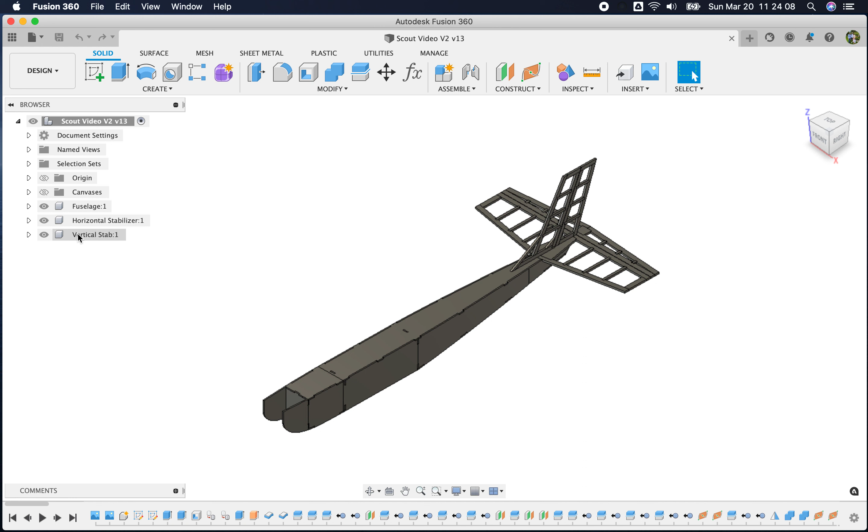But one thing I wanted to do really quick, someone asked me how to export these files or parts into a format you can transfer to a laser, CNC, or whatever. I'm just going to do the real simple version, and later on I'll tackle how to achieve that with the curved surfaces on the fuselage sides. That's a little more involved process, but real quick, I just want to show how you can export these flat pieces into a file you can send to Lightburn or whatever you're using for your CNC operations.

It's really not too difficult. Let me turn off all of these things, and I'm going to use this top piece here and show you how that works.

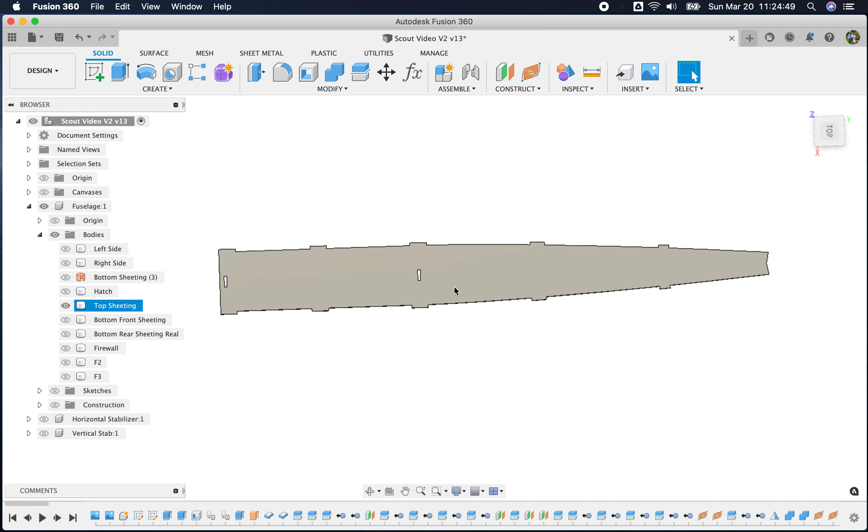This piece is flat, which makes it almost ready to go as it is. But we have these holes, tabs, slots, and other shapes. There are several ways to do this, and some videos out there talk about it, but the simplest way is to click on the face of what you want to export. I'm going to click on that and say create sketch, and that will select this, and we want to project all of this outline and these shapes.

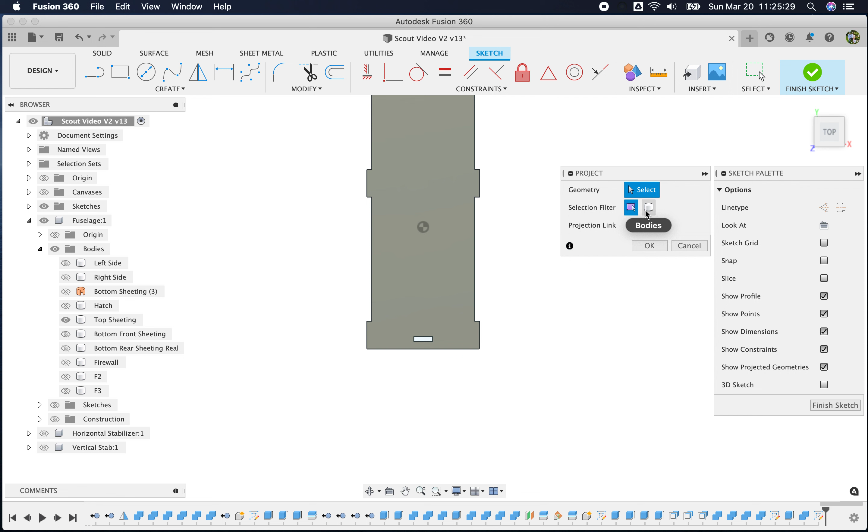I'm going to hit P for project, and choose specified entities, not the whole body. Sometimes that can get a little strange, sometimes not. If you notice, when I hover over this, you see all that red — those are the lines that will get projected into the new sketch. I'll click on that to select it all, say OK, and from here we can finish the sketch.

Now we need to find our sketch. That sketch is up here because this was selected — here it is, and we can turn the body off. If you look, this shows our outline, and we have our slots for everything here.

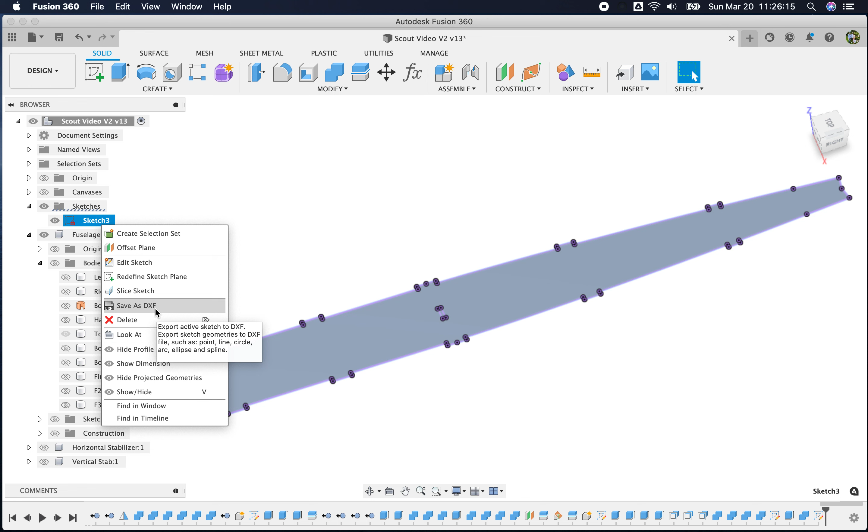I'm going to right click on the sketch and save as DXF. Really simple. I have different spots where I save things, so I'm going to create a new folder here — this is the Scout. I'll call this cut files, but you call it whatever you like. This is just my way of sorting things.

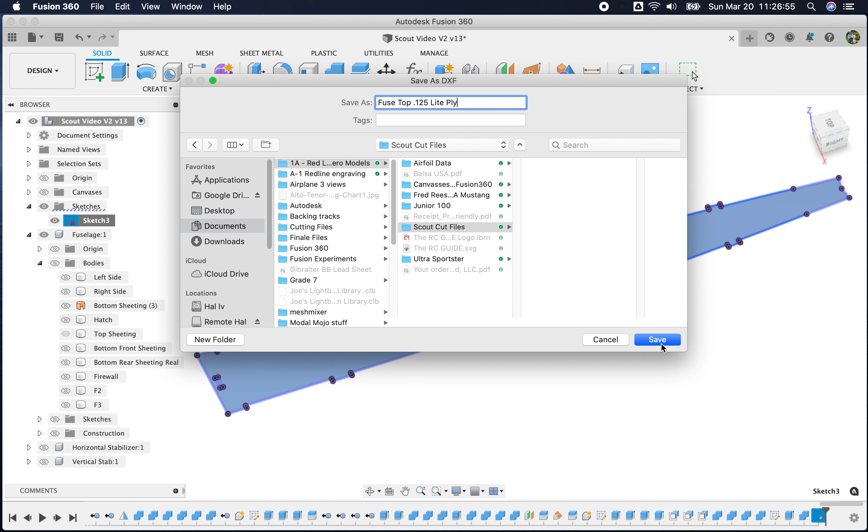Then I'm going to save this as Fuse Top, and I'll put the material in there. Normally what I do, I'll show you real quick. Alright, so I'm going to save that like that.

So now if we go to my Finder here, here's my folder. Usually what I like to do is make all these parts — there's my aluminum parts, these are my 3/16 balsa parts, and fuselage parts are broken down by the different materials in here. I'm going to cut this airplane out soon, so I'll show you all what that looks like.

So now what I do, I use Lightburn to drive my lasers. It's just a simple matter of importing it into Lightburn — where's our folder? Where did the Scout go? There we go, man, I'm blind this morning. Then I hit open, and there it is.

Depending on your workflow in laser, which we can get into later on, there we go — that's the part exported into our machine, or the software that talks to our machine. That's the simple one; we'll get into more complicated parts later on.

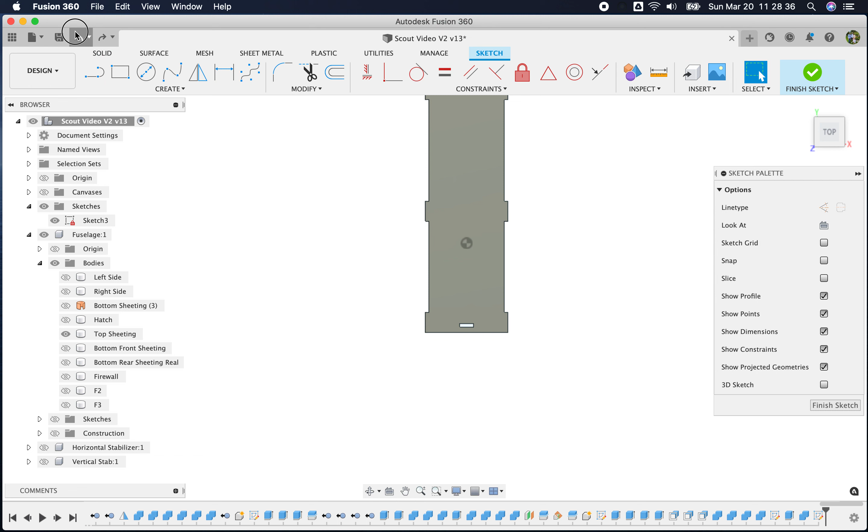All right, now we're going to go back into Fusion. I don't need this right now, so I'm just going to undo what I did, and then we're going to go back to talking about wings.

Okay, so we need to create a new component — again, always create new components. I always build one wing and then mirror the whole component, that way you only have to build it once. So I'm going to call this left wing.

All right, now we have the left wing highlighted, and let's go turn on our canvas, and let's see if we get our side profile canvas.

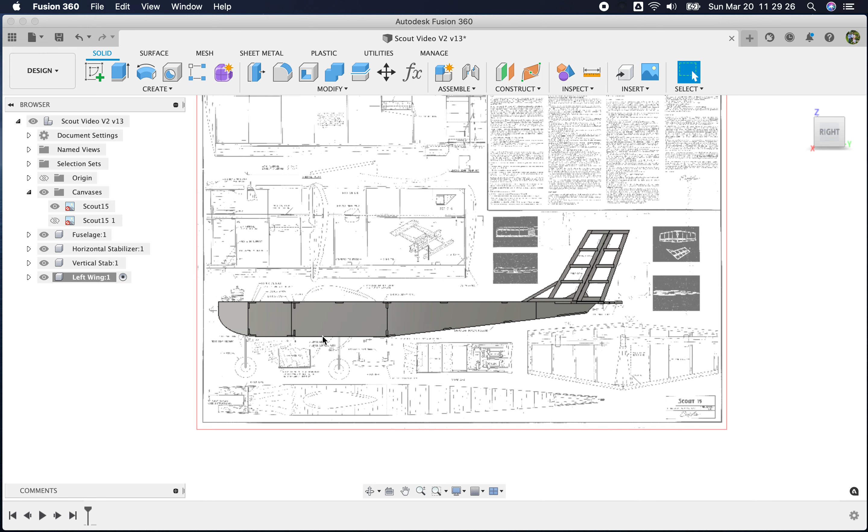Yeah, for some reason, this thing got really slow when dealing with some of these canvases, and I'm not totally sure why. Okay. I'm going to turn the fuselage off for now, and I don't need these others. All I need is this right here.

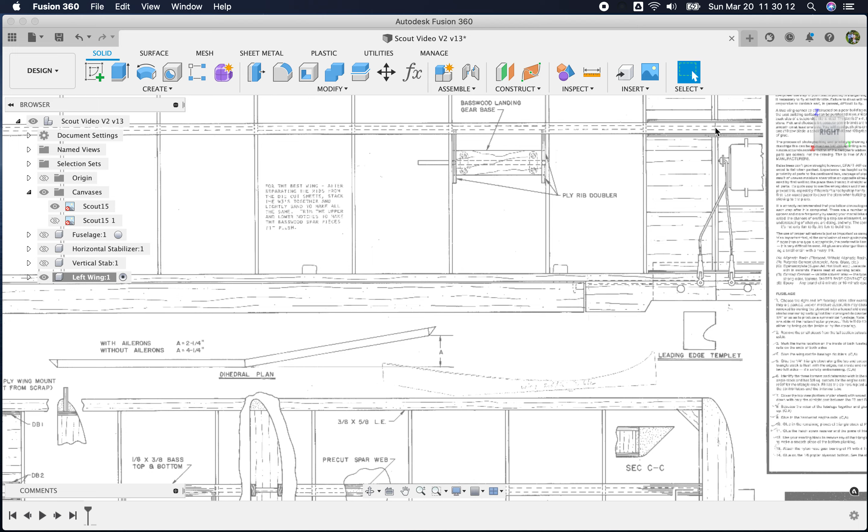So this wing has some dihedral built into it, and it tells us what that is. With ailerons is 2 1/4. Without ailerons is 4 1/4. So I'm not a math genius, and there's trigonometry that's involved there, and it's really simple, but I don't want to think that hard. So what I'm going to do is measure this distance from the center of the wing to the edge of this last rib, which is where this height is measured, to get our dihedral.

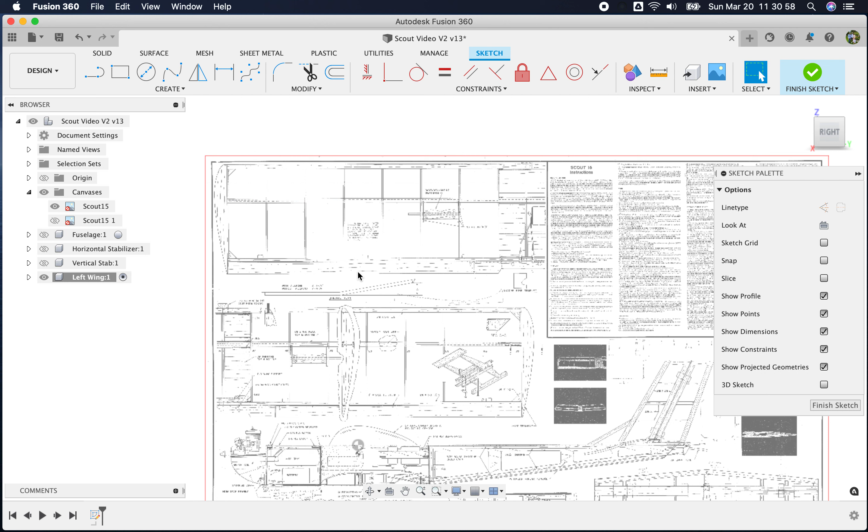So let's create a sketch on this plane, and I just want to draw me a line to measure that, which is there, and let's go to here. So out to there, it's 24 inches roughly. That'll work for us. And I don't need that line, so I can get rid of that. Okay, I don't even need this sketch. Let's just undo this right here.

Okay, so 24 inches, and at 24 inches, this length, and then we know this number, but we don't know this number, and we don't know what the angle is. And there are some calculators online that work pretty well for that. Let's see here. All right, I can't remember what it was. Let's try this. Angle calculator. Yeah, this Omni calculator is absolutely fantastic.

So we know A, which is going to be 2 1/4, right? We know C, which is 24. So that means B is 23.894, which is handy. So if you can't find that, it's omnicalculator.com. It has lots and lots of different calculators to save you a lot of time. And it also gives me this angle, because I need this angle here. So angle A is 5.379. I'm going to simplify that and go 5 degrees.

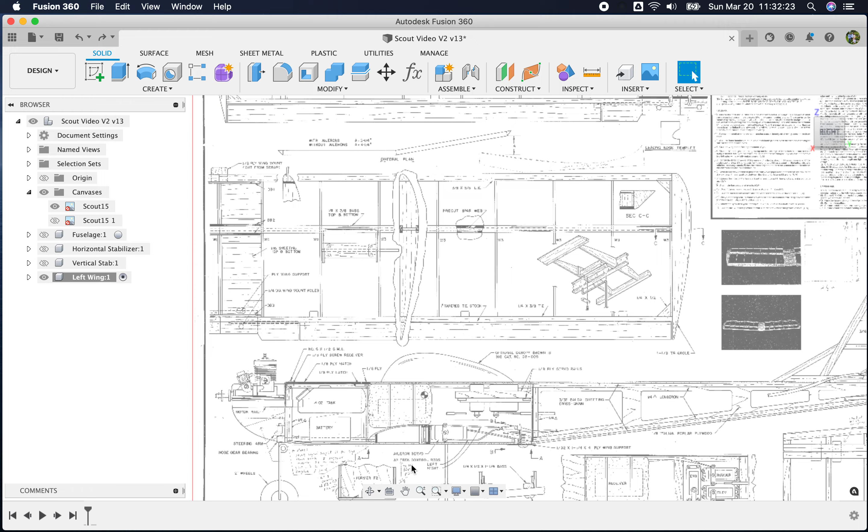All right, so I'm going to create a plane on an angle for right here at the bottom of our wing. And the bottom of this wing is going to work fine. If you're working with a symmetrical airfoil or semi-symmetrical airfoil, you'll want to use the datum line to create your dihedral line. Okay, so let's go ahead and start a sketch here. And what I want to do is just draw a guideline at the bottom of this, and that's good.

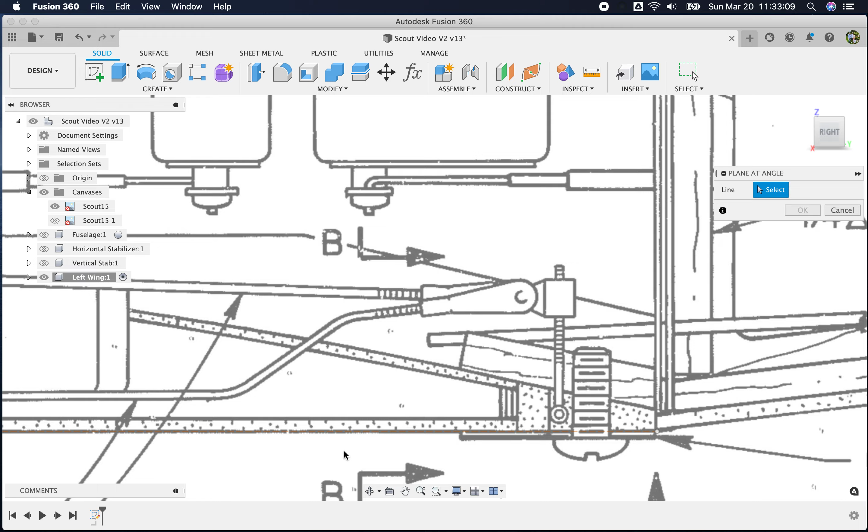And we can actually finish this sketch for now, and I'm gonna go up to construct, and I want to create a plane at an angle, and I want to select that, and we want it to be 5 degrees. If you want it more, you can do it more. Now you notice this angle would be going the wrong way on our left wing, so we need to go -5. So I'm going to go -5, and now we're going to go up on the left wing, which is what we want. So there we go.

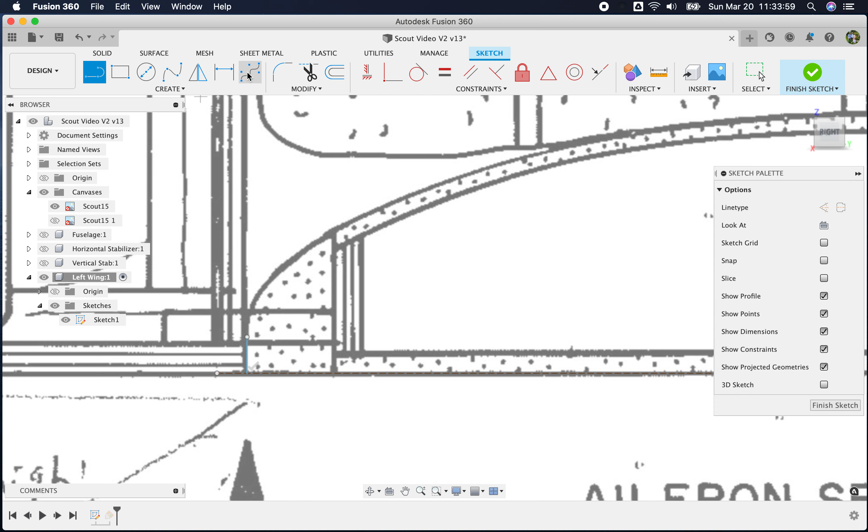So we have that. And now let's go back to this first sketch we did for that guideline. And I'm going to edit that sketch. So I'm going to go here and start drawing our wing profile. Now, there are ways to import specific airfoils into Fusion, and I will get into that at a later date. But for now, we're just going to trace this with our control point spline tool. And the one thing, you want as few splines as possible. You get too many, things will start getting wonky.

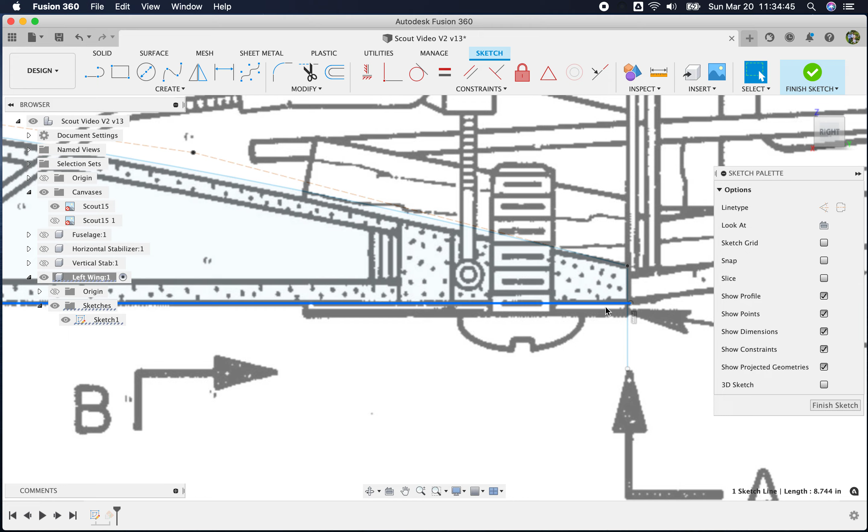And again, defining these sketches is very important. I can't stress that enough. We can actually take this line and we'll convert that to a regular line. If you notice, I didn't click here. You can convert to a construction line or to a regular vector line by hitting X on your keyboard. See, right now we have a regular line, and I hit X, then it turns into a construction line.

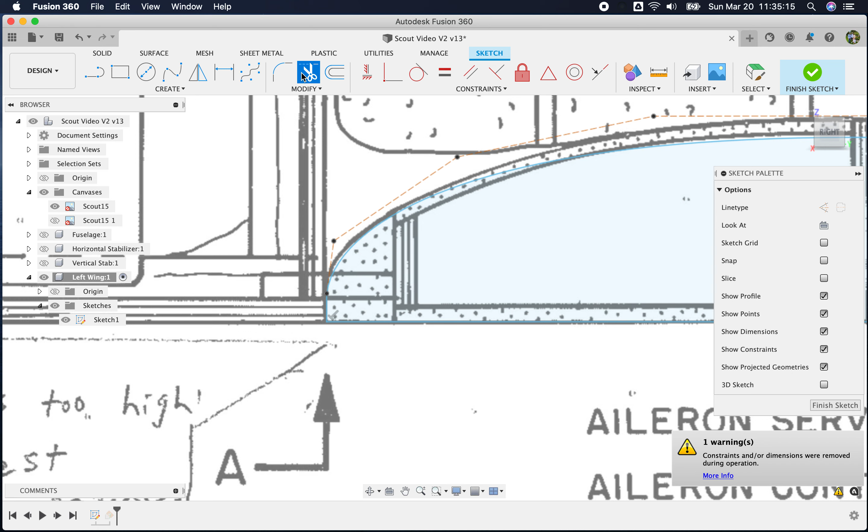All right, so let's trim this excess away. That's the wrong way. I don't know why we did that. Okay. Go here, go there. That's what we want. Now let's trim this off over here, and let's get our spline working the way we want it. And we'll get the select tool and move our points to where we follow our profile a little nicer.

Now I know there's probably 100 ways to do this, but I have found this method to give me the best results, short of importing a specific airfoil, which, like I said, we'll talk about that later. But this works pretty well for me. Okay.

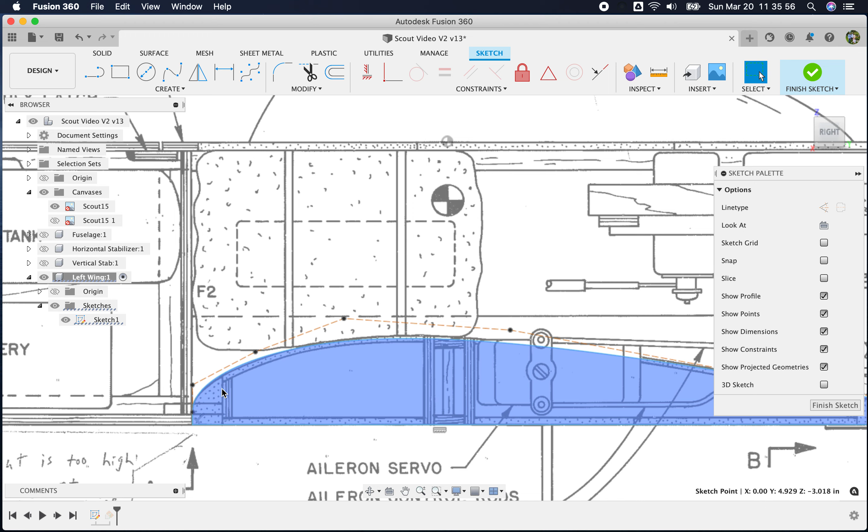And when you see how easy this is, you're going to be shocked. There's not a lot of mystery to this. Even when I first started learning Fusion, the wings didn't bother me as much as the fuselage did. The fuselage has a whole lot more parts to it that make it a little more challenging. All right, so we're looking pretty good there.

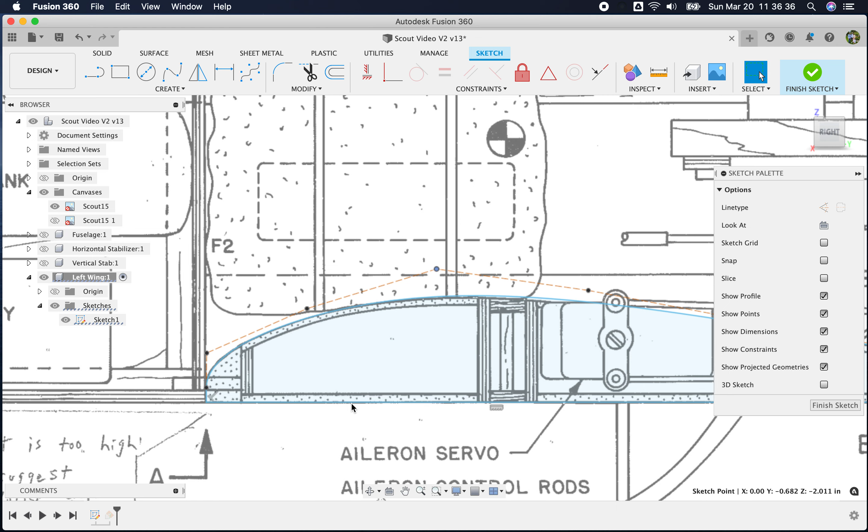It's not perfect, and you can make it as perfect as you want. The best way, the most accurate way, is to import a regular airfoil profile. But we're using this kit plan to create our model here. So now let's go and define all this.

Again, I had someone ask me why I defined all these, and I said, well, if you don't, strange things are going to happen later on, and it's going to cause you a lot of grief. So fully define your sketches. I can't stress that enough.

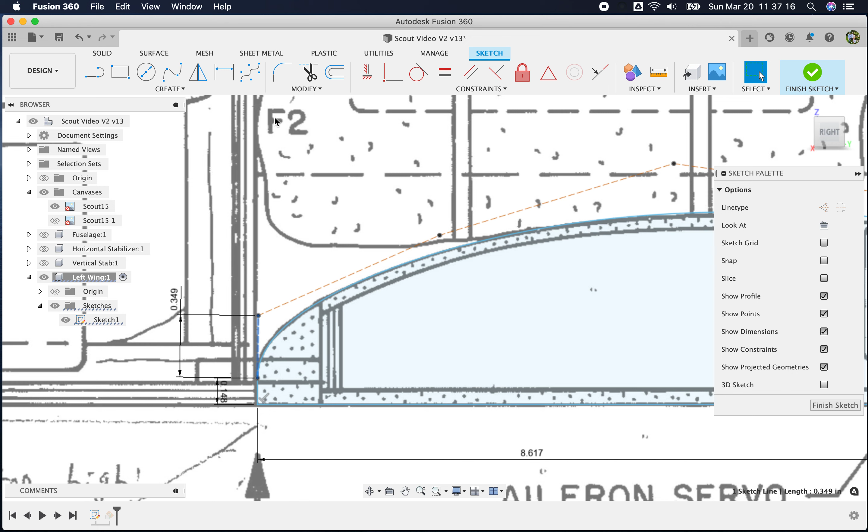Every now and then there may be a spot that you don't have to, but you'll learn where. But with airfoils, you've got to do that, otherwise you're in trouble. I tried it without doing it, and I constantly had problems getting these things to work. So remember, on these control point splines, we're defining the angles between all these and the lengths between our points. So there's two definitions to all these.

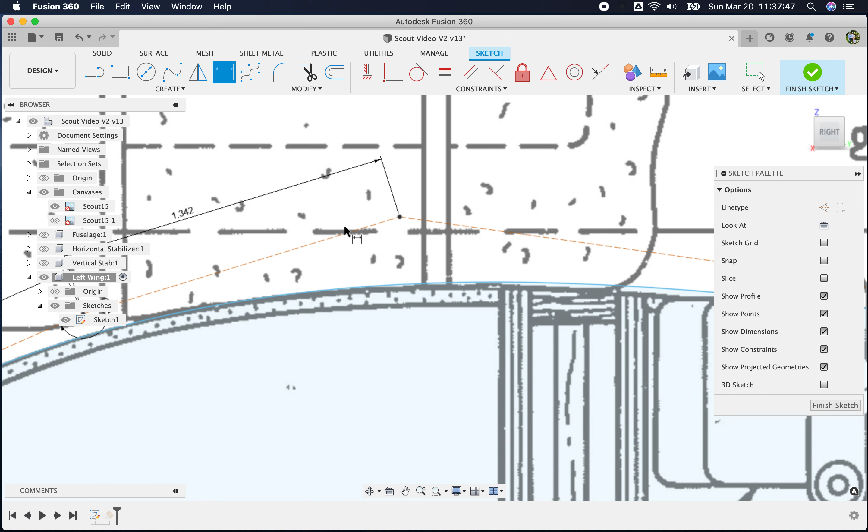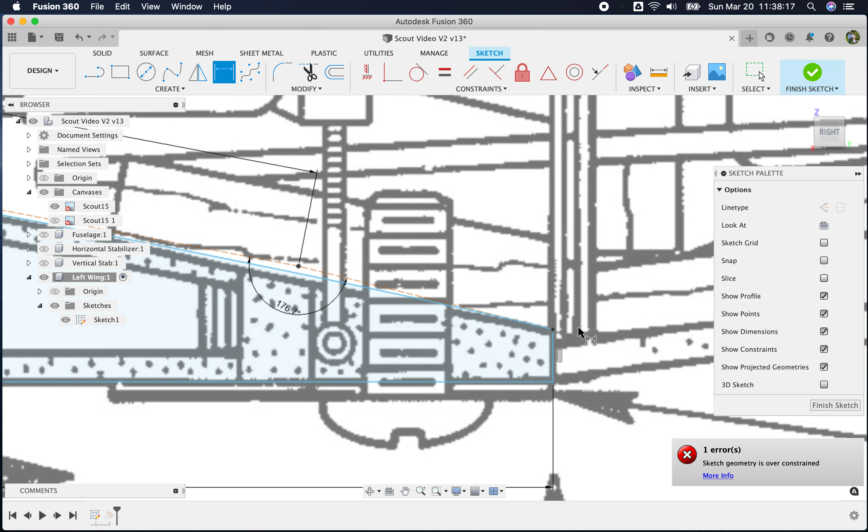All right, and this angle. Yeah, this is slightly tedious work, but I can tell you that my part's accuracy went up by a huge amount compared to when I was 2D drawing. In later videos, I'm going to show where I'm cutting parts and more about what I do with LightBurn to control my details. Okay, so we don't need those.

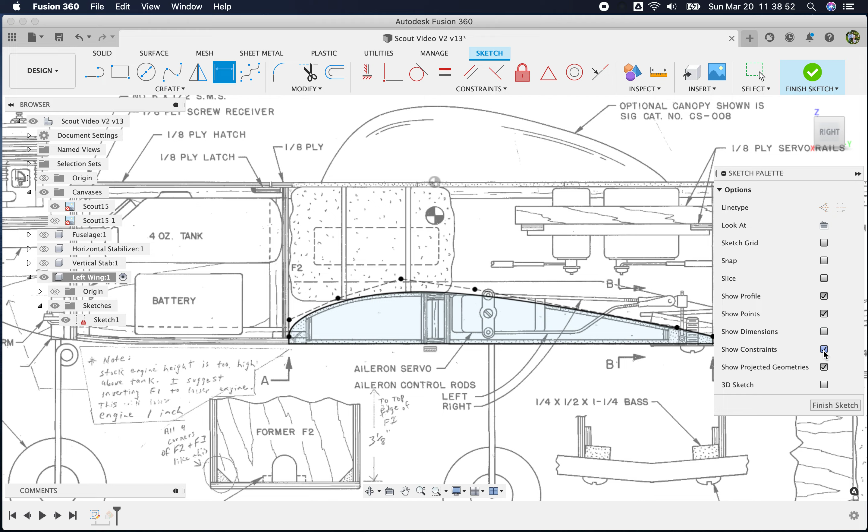This should be 90 degrees, which it is. We need to define this. All right, so all those are good. Let's define it from our origin, and that will help a lot. This point, there we go. And now again, we can turn the dimensions off and the constraints off, and you can see what our drawing looks like, and all of it is black, which is what we want. So we finished that sketch.

Now this is kind of fun right here. There's a couple of ways to build these wings, and in this instance I'm going to build it with a dihedral built in. You could also build it flat and then rotate it. You just have to make sure you have a really good rotation point. In fact, I'll show that really quick.

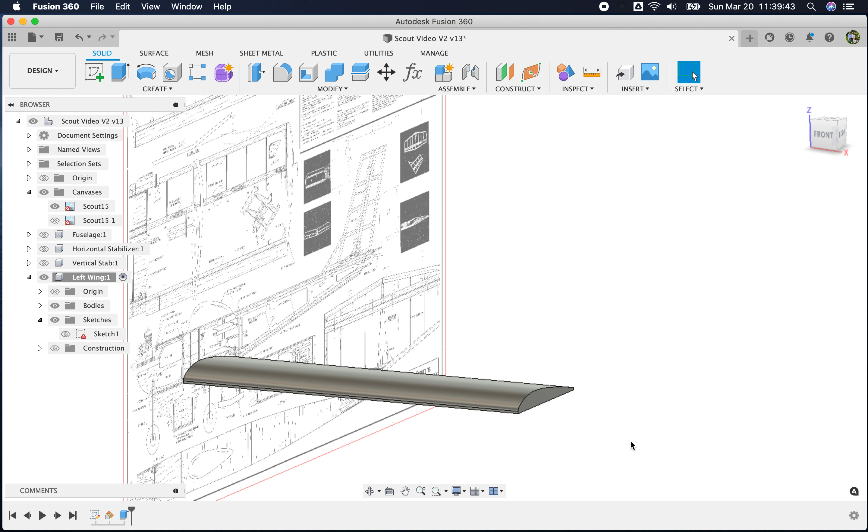So you can extrude this, and we're going to extrude it 24 inches out. And so there's our basic wing. We can start working from this, but the problem is this has no dihedral. So you would hit M, or select up here, to move/copy. I'm going to hit M, and you can pick the move type.

I want it to be a free move, but I want to set my pivot point, and I have to set it in plane with the angle that I want, because if you set it in the wrong spot, you may get a sweep one way or the other, or a weird rotation. So you have to pick a spot that gives you the right in-plane rotation here.

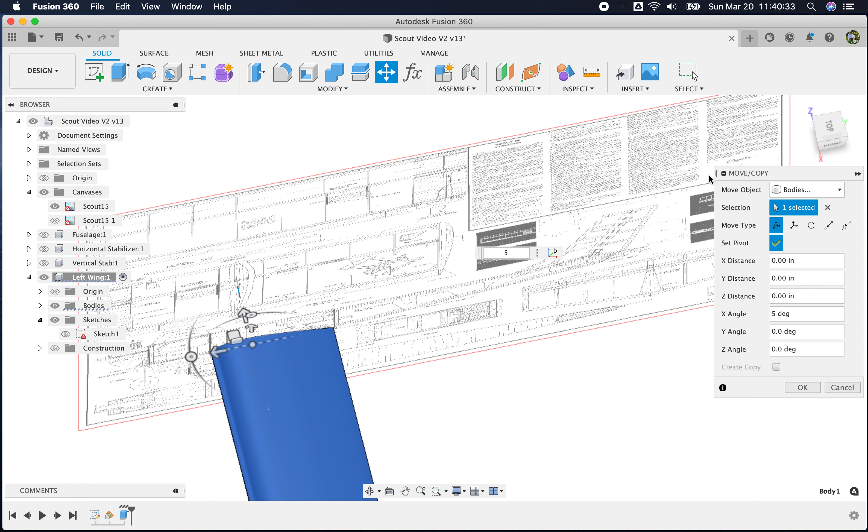So that part looks pretty flat, and then I'm going to rotate this up 5 degrees, which is pretty close to specified. And if we look from the top, we look pretty good. It doesn't look like it twisted or anything. So that's one way.

Now I want to show another way to create the same type of body along our construction plane that we did earlier. We're going to create a sketch on this construction plane, and we want to project. I'm going to turn the canvas off. We want to project basically this line, because that's the line that we use for our angle.

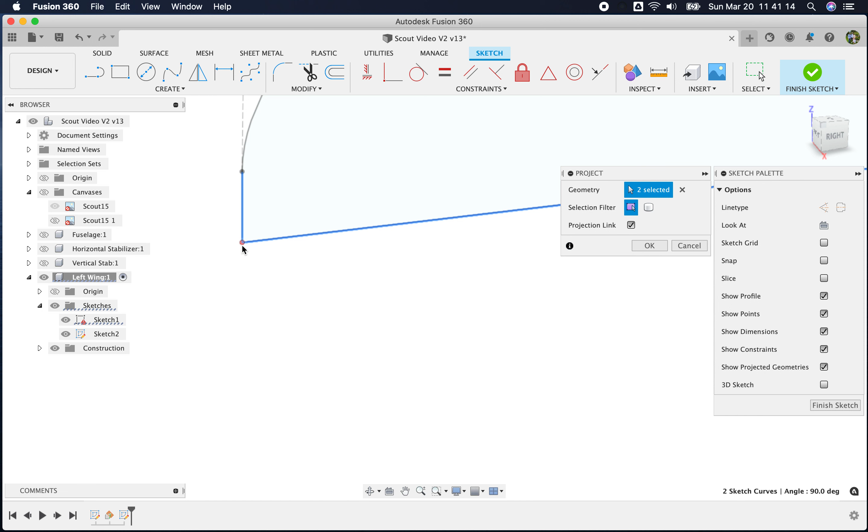I want to project that point. I don't want this line, that point, that line, and that point. So I'm going to click OK. The one thing about this method is this is the method you're going to use for making elliptical wings and sweeps, and it's going to be a little more intuitive.

So I'm going to draw a line now from this point right here, and I want it to be 90 degrees from that other line there, and I want it to be 24 inches long. And again, I'm going to draw another line the same way here.

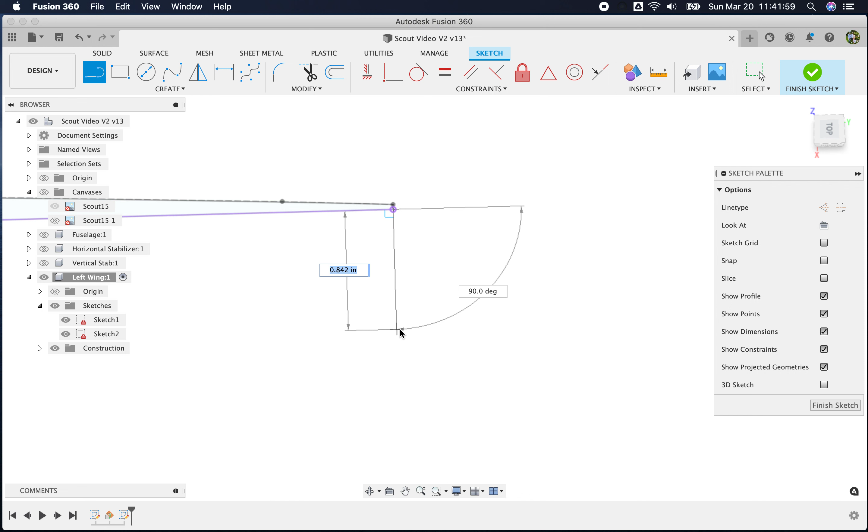Going to come out, make sure we're at 90, we're going to go 24, and you can lock in at 90 also. So there we go. Now we really don't need anything else. We're going to finish that sketch, and we're going to go up here to create.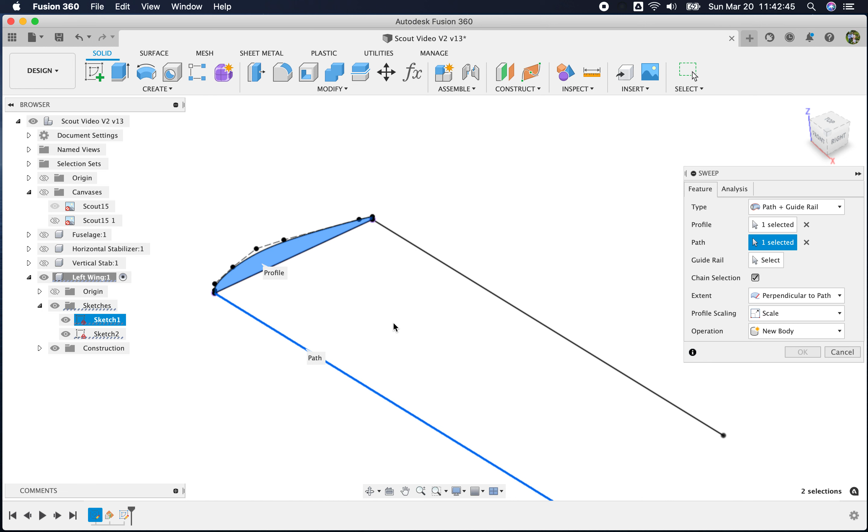And again, if you're doing swept wings or elliptical wings, this is the way you're going to have to do it. So we want to select our profile, which is that one. In this instance, you could go single path. But for elliptical wings and swept wings, you're going to want to go path plus guide rail, okay? So I'm going to select path plus guide rail. We have our profile selected, and I'm going to select the path. This is going to be the path, and this is going to be the guide rail.

So you have some other options here for extent, and you can go perpendicular to the path. But in most cases, what I do is go on full extents, which means it's going to go to the end of our path and our guide rail. So I'm going to click OK. Now, if we look at this head on, we have a wing with some dihedral. Now we do have this weird angle here, and I don't need this.

Okay, I don't need my text to be bothering me.

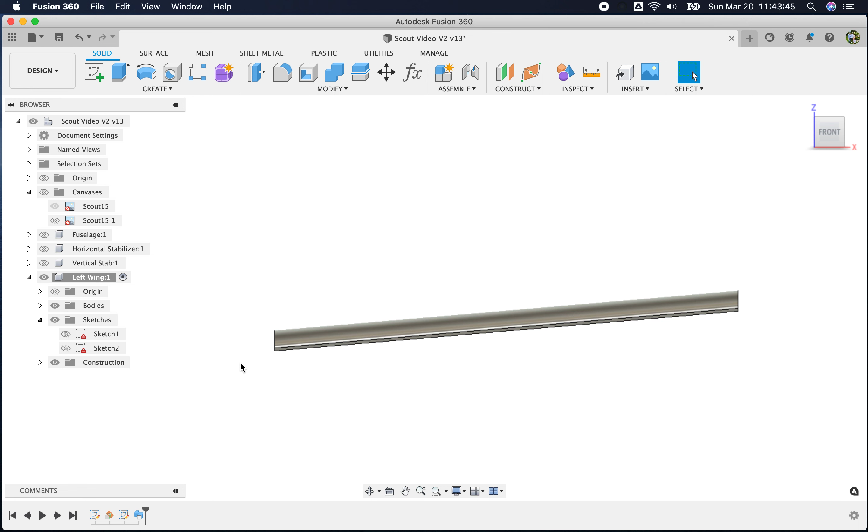Sorry about that. But this end is correct, right? Because it's going to be perpendicular to the flat plane of the fuselage here. This one we'll fix later. No big deal. All right, so there you have it. There is our basic wing shape. So now we have to start cutting this up into the parts. Again, there's a lot of different ways, but here's one method that I often use.

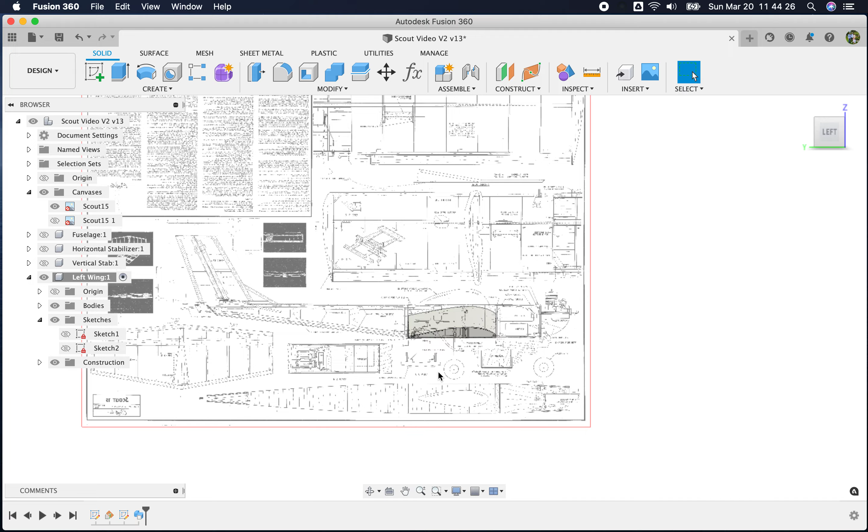I'm going to turn our canvas back on, and I'm going to look at this from our root rib. So there's our wing going out to the left side of the airplane, and now we're looking at our root rib. Our leading edge is this piece right here, and we can look at the material specs for that leading edge, and it says 3/8 by 5/8. So it's 3/8 back from the leading edge.

What I want to do now is create a sketch on the edge of this body, and I want this line. I didn't want to do the dimension thing there. Sorry about that. I wanted to use the double line here, or the offset, and I want to move this back 3/8. Okay. And here you can put in your decimal equivalent. You can put in metric. You can put in fractions. I live in the U.S., and for some reason we use a lot of fractions, although I do use metric quite a bit.

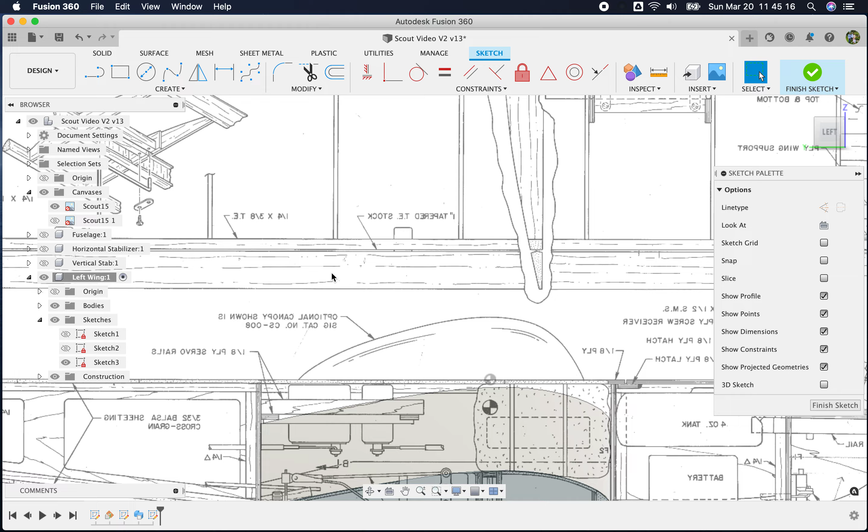The trailing edge here is, what do we have? We got a 1-inch tapered stock and a 1/4 inch by 3/8 trailing edge. So this is technically 1 1/4 from the trailing edge to the inside of it where it makes contact with the ribs. So I'm going to go right here, and I'm going to do an offset. I'm going to turn chain selection off because the only thing I want is this right here. And we're going to move that in 1.25, negative 1.25.

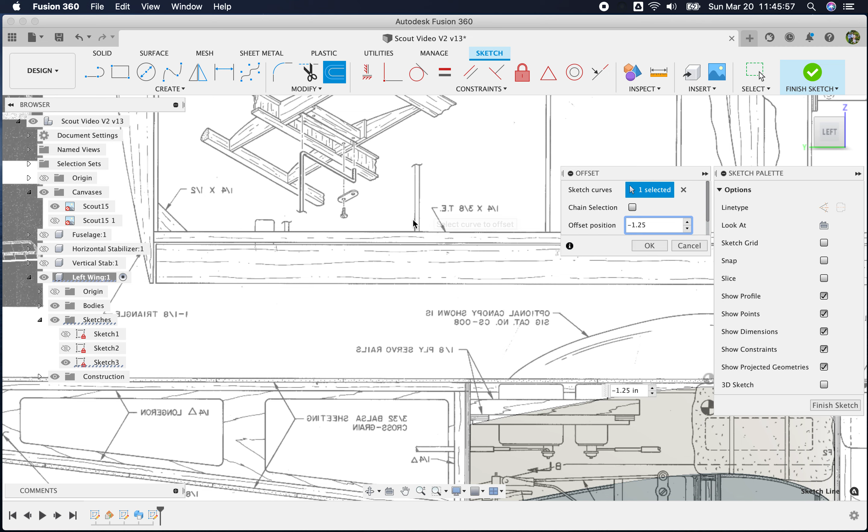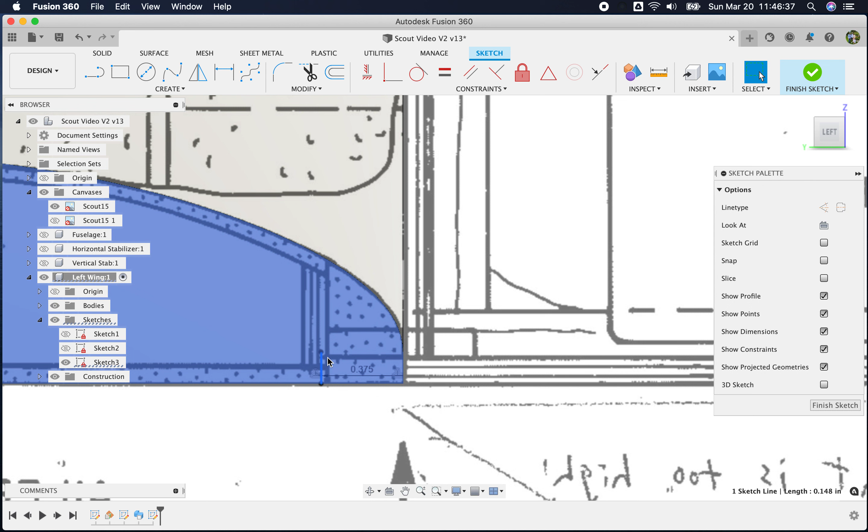And that's weird because that's what it shows. Is there something? Let me look at the center here. No, the center should be lining up that way as well. Huh. All right, I'm not going to stress too much about the measurements. I will just put it where it ends. This part looks like a dihedral brace, I'm guessing. Yeah, that's a dihedral brace there. And I'm going to click OK. And let's change this a little bit. I'm going to delete this line. All right, we're going to do that again.

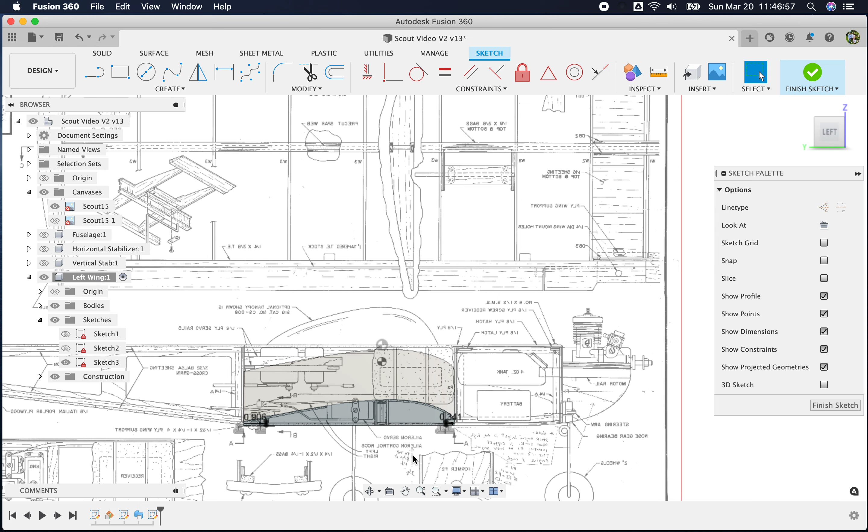And one thing you will notice is a lot of plans, even though you may have it scaled right, and I'm not sure if I have this scaled exactly or not, don't always line up. And that's one of the reasons why I take old plans and draw them out again in 3D, so that way when I go to cut, all my parts fit perfectly. And that's the beauty of modeling in 3D.

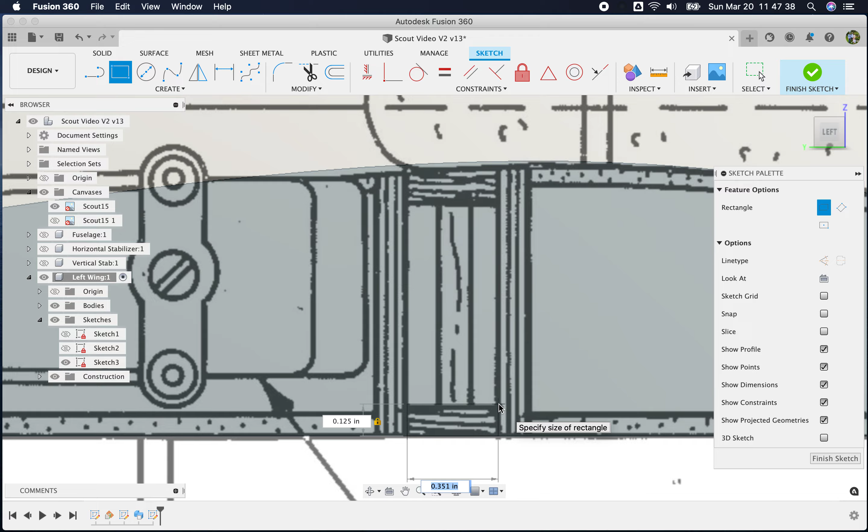All right, so now we have our spars. So this is 1/8 by 3/8 on the spars. So we can do that here. I'm going to do a box, and we can do this 1/8 of an inch. Yeah, see, that looks right. It was 1/8 by 3/8. Is that what it was? I need more coffee this morning. Yeah, 1/8 by 3/8. Let's see what that looks like.

Yeah, so that lined up right. Except I'm on the wrong side of things here. I'm using my laptop, and I have a keyboard that I use for it, but it doesn't have command on it.

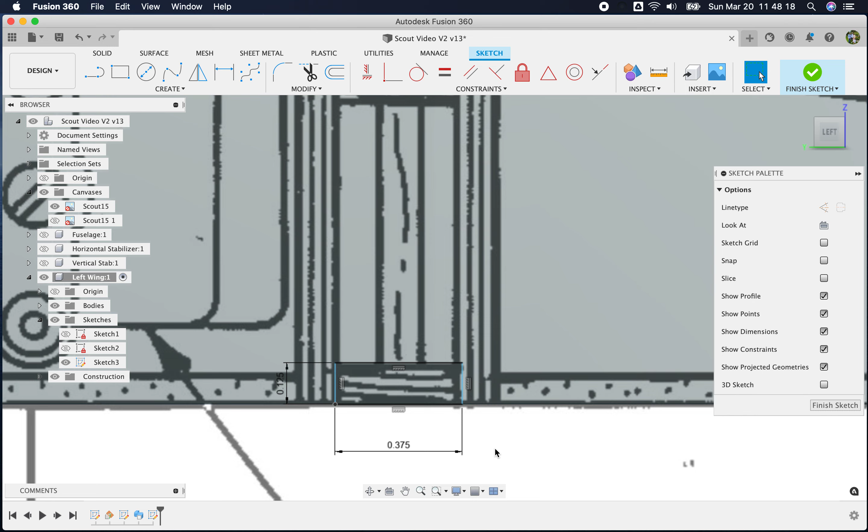So all right, so there is our spar there and the top spar. And one of the things with spars is it's a little tricky when you're drawing any kind of spar on a curved surface. You have to imagine it, you're either going to sand away part of it to match the contour, or it's going to be below the surface of the contour. And in this instance, I am going to make it be sanded to the contour. All right, there we go.

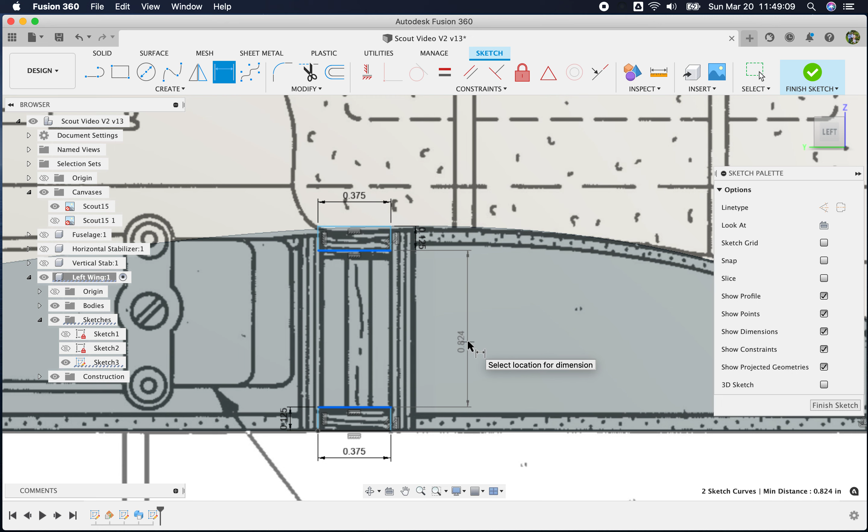And let's make this line and this line on the same area, and let's go ahead and dimension this. We're not going to worry about the wing joiners or the dihedral braces at this time. They will be cut in later. The main thing we want to do is get our spars all cut out and trimmed. And the centerpiece has some sheeting on it, so I'm going to also do that, and I could do it after I cut out my spars. I think I will. Okay, so there we have all our spars drawn in there.

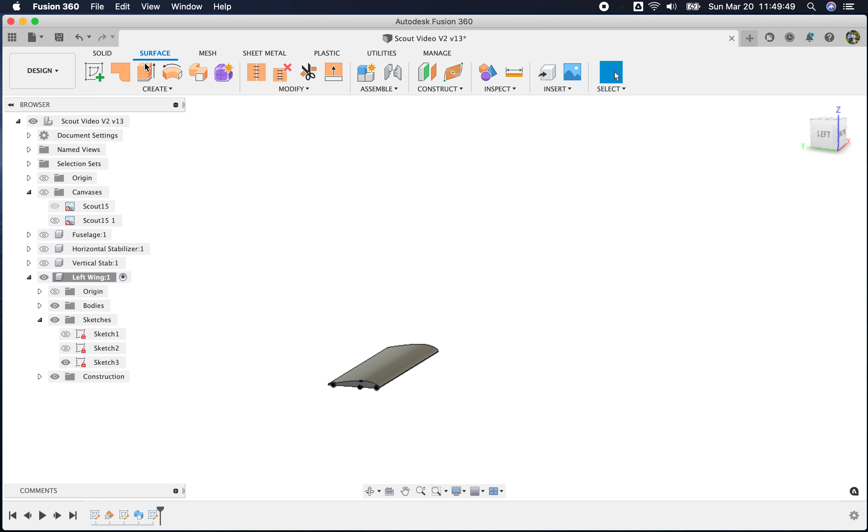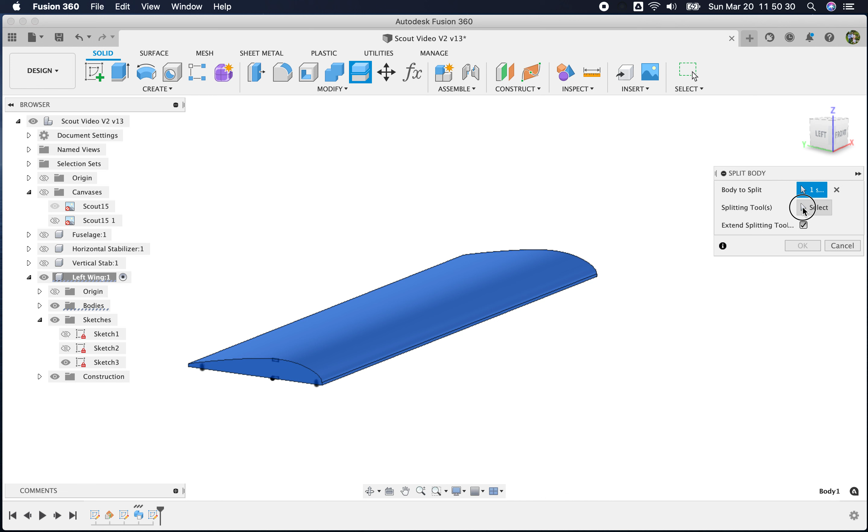Let's turn our canvas off now, and I'm going to use these sketches to create extrudes of these lines, all of these shapes. And you're going to see how I split this in a minute. And you notice we didn't go in plane because this is flat. Okay, let's just cancel that. All right, so let's do this. Let's go to split body, and nope, I don't want that. I want split body, and we can split this, and the splitting tool is going to be this line and this line, which will cut out our leading edge and trailing edge.

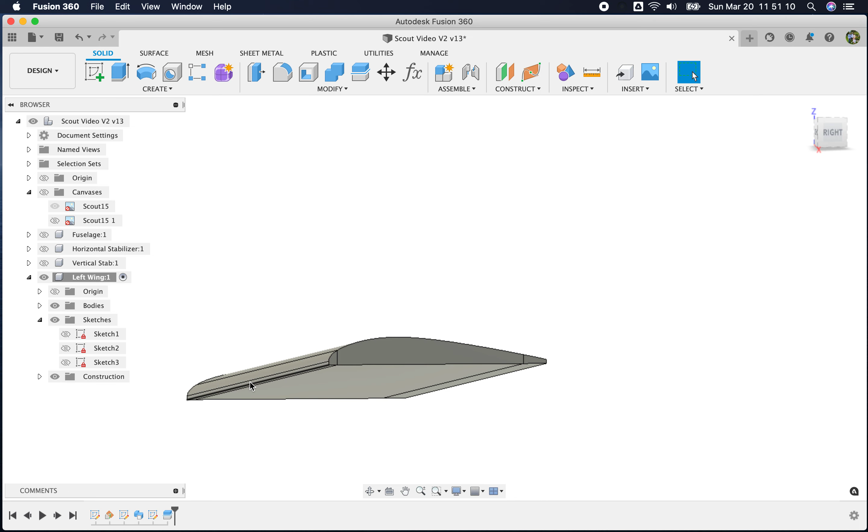So there that is. Now for our spars, we can do sweeps, and we might just do that. I think I can. Or you can draw another one. And this is the one thing, when you do create the dihedral at the beginning, it gets a little tricky because nothing wants to go that direction. It wants to go in plane perpendicular to our center rib, and not run up this plane with everything. But it's never a problem. Just like we split that, so that's no big deal.

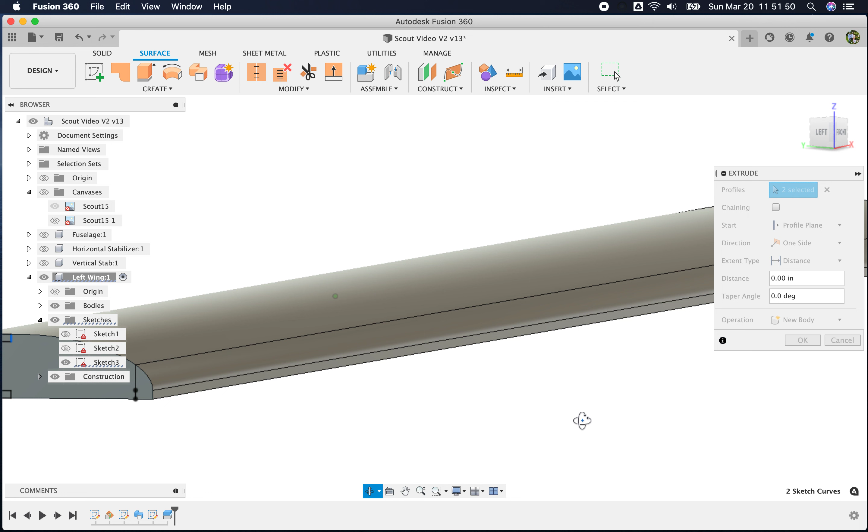So what I can do, let's go back in there into this sketch, and I want to split this body again, but we don't want that tool. What I want to split it with, not that. Let's go here to surface, and I'm going to create extrude. I'm going to turn the chaining off, and we'll do it just like this. And as long as we clear all that, we're good. Okay, so I'm going to go okay there, go back to solid, split body, click on that center body, and our splitting tool is this and that, and click OK.

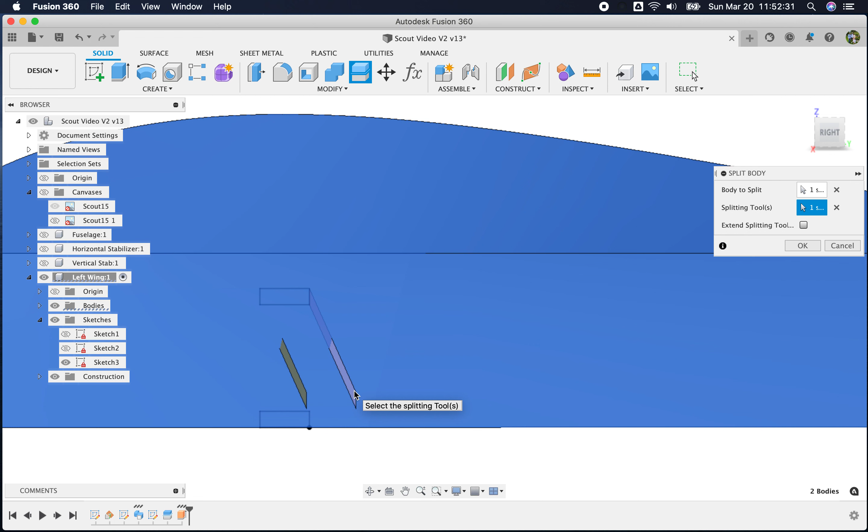And it didn't split it for some reason. Let's try that again. Split this, and splitting tool, that one. I don't know why it's not extending that. Oh, extend splitting tool. That's what we want. There we go. And say OK. Now that will create that. So now all we need to do, we're going to split this again right in here, and then we will make the spar slots. And like I said, there's several different ways to do that.

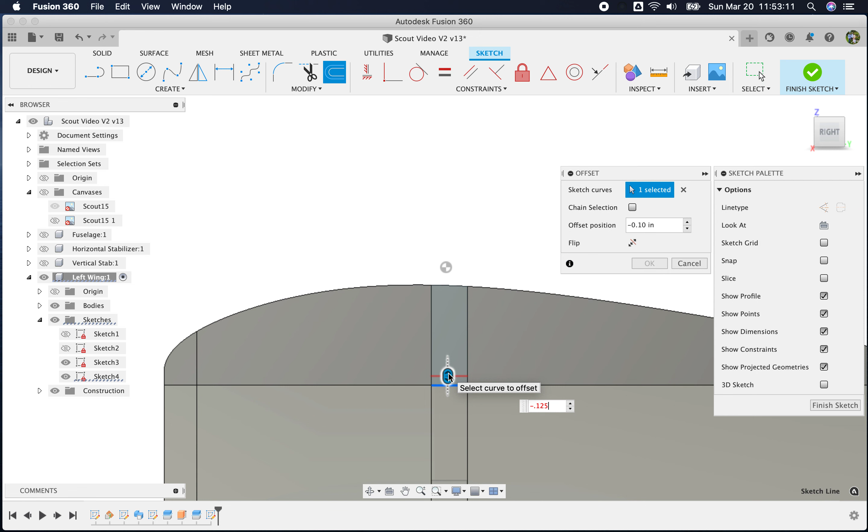So I'm going to create a sketch. I'll create a sketch on this plane right here, and we know that this is going to be an 1/8 inch up, 0.125. Say OK, and we're going to draw a square here. The dimensions that we have. Oops, that's supposed to be 3/8. And 0.125, click OK. Now, oh, I could have done that earlier and just created a loft between those two. I'll show you that method, which is probably what I should have done.

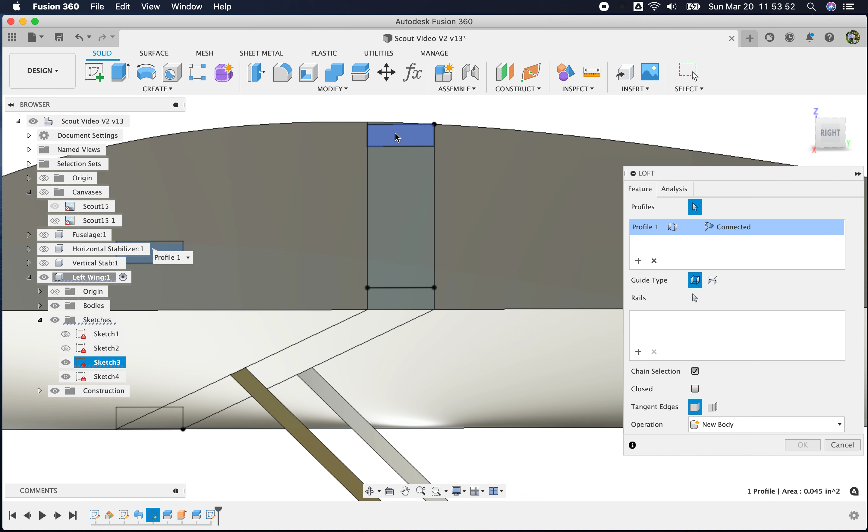I want this profile to go to this profile. It's going to cut, which is exactly what we want. We need to cancel that. This is incorrect. Let's go back to that sketch. There we go. And let's remove that. There we go. Yeah, I was making all that talk about the contours having to be sanded in this part here, and I messed up. There we go. That's what we want. Now finish the sketch.

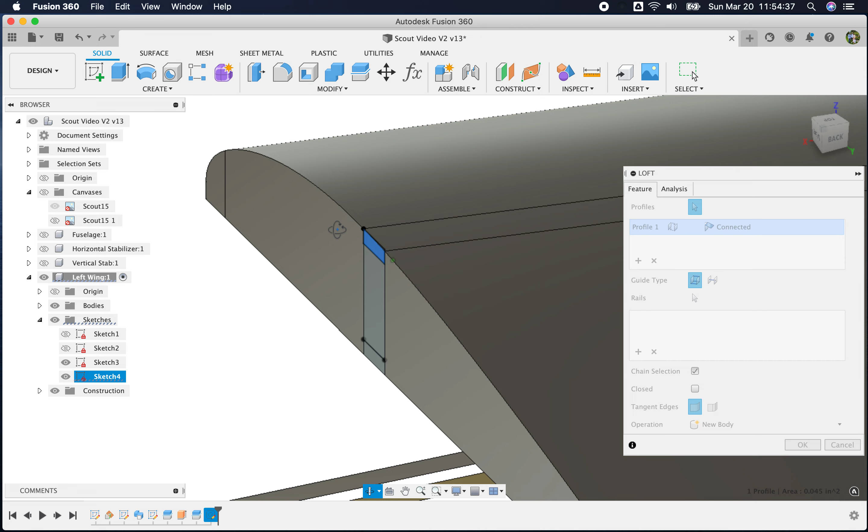Go to loft, create loft between this profile and this profile. We want that to cut, which is exactly what we want. And now that's all cut beautifully. I'm going to turn off these bodies. Don't need them anymore. And we're going to repeat the loft between here.

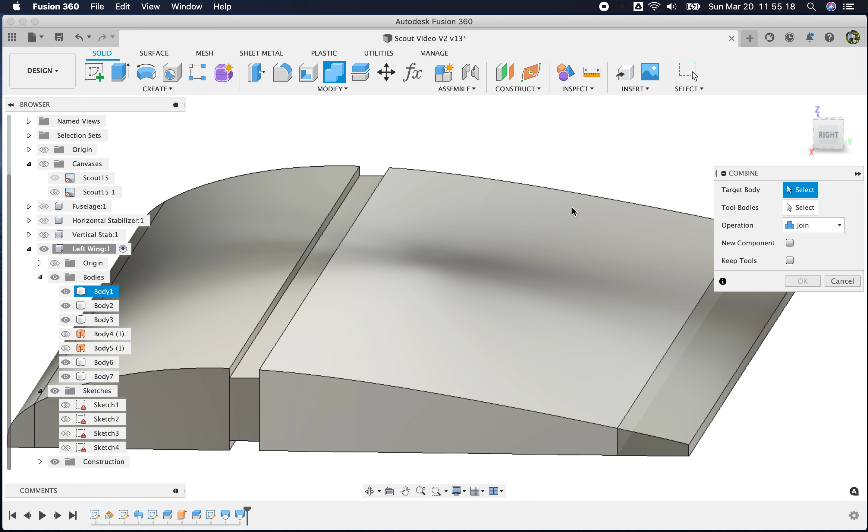And you can do a sweep here too if you draw your guidelines. That's another way. And turn this sketch on, and we want that there, and we say cut. We say OK. There we have spar slots, but this middle piece is not joining the front and back. That's okay. We're going to go to combine and operation join and select the middle, select that, and now we

join that. So there we have our slots for our spars, and we actually have our leading edge and trailing edge, which was very simple. And there we have that. So now let's create this end rib. A lot of instances, I don't know what the plan is speccing, but a lot of the instances the end rib is usually thicker than the inner ribs.

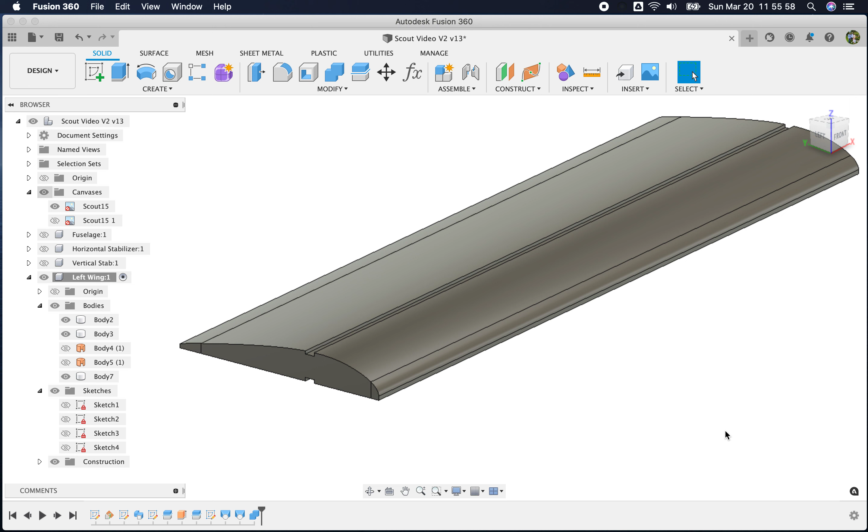Let's look and see what they spec as far as material here. It looks like it doesn't say what those ribs are. Huh. All right. Well, I'm going to go with 3/32 on my inner ribs and then 1/8 inch on my center ribs. That would be W1 and W2. All right, we can turn this off.

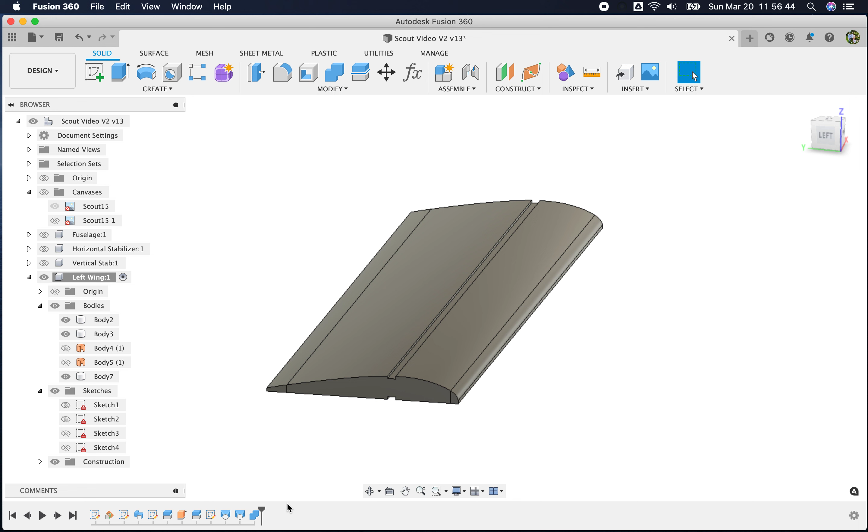Let's go home. There's our wing, and we're going to go right here. I'm going to create an offset plane from this face, and I want it to be -1/8. There, okay. And that will take care of that. So if I split body, I split this body with this plane. Now we have our end rib, just like that.

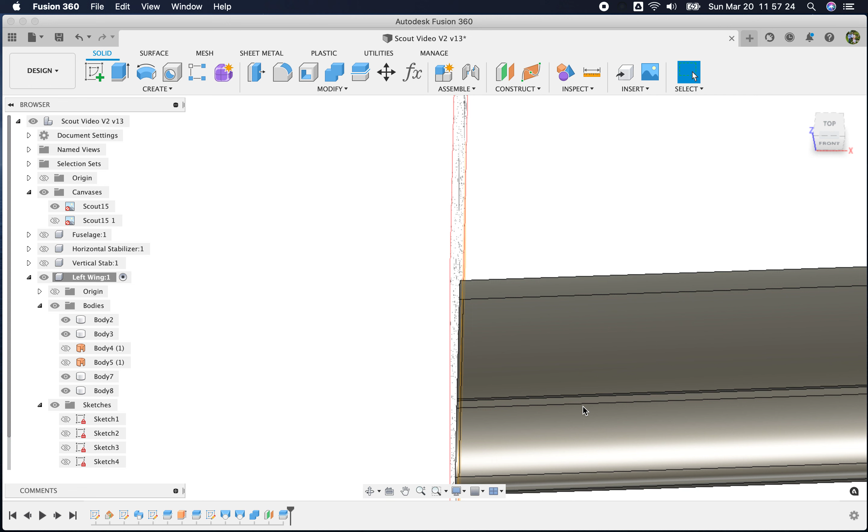Okay, now let's do our W2 rib. Let's kind of see what the spacing is there. I think I moved that top plane. Yeah, I did. Over to there. But that's fine. I'm going to space it out with the width of the fuselage. So let's turn that off. Let's turn the fuselage on. Yeah, so I think W2 should fall in line with the edge of the fuselage, like right in here.

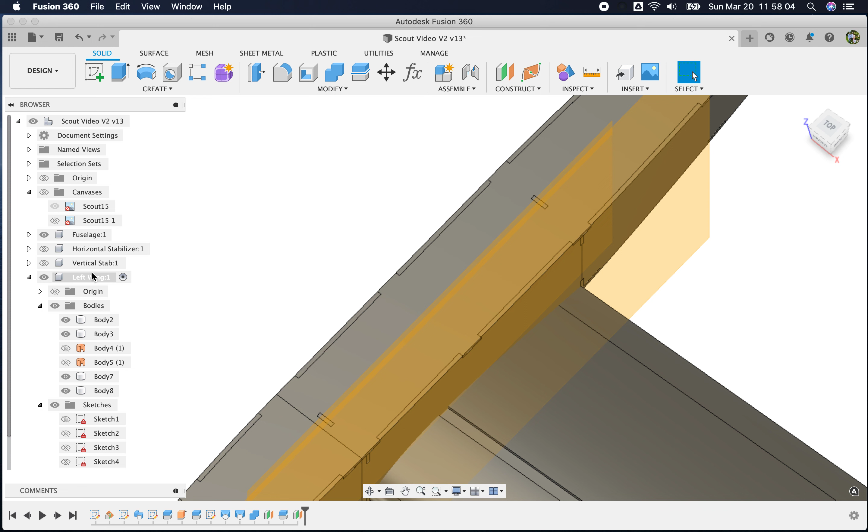I'm actually going to do an offset plane on the side of the fuselage. And we're going to click OK there. I'm not going to move it out. Let's turn our canvas off, and let's turn our fuselage off, and let's turn this other plane off. So we have the one, and I'm going to go split body, split this body with this tool, and there we have it.

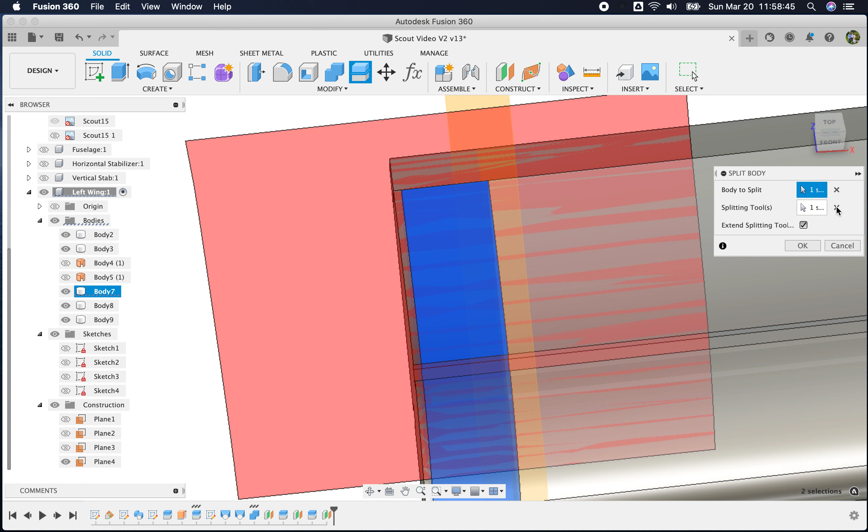Now let us do an offset plane from here. We can do it off of this plane, and I'm going to go negative 0.125, and then that will create that. Let's turn off this plane, and then we want to split this body with this tool, and we select OK, and there we have our two inside ribs that will get trimmed later with the other stuff there.

Okay, so one of the weird things I just did, and I just realized, is this is not right. You see, this rib should be perpendicular to our leading edge and trailing edge at that angle. And this isn't. So why did I do it that way? I'm doing more undos in this video than any other video before, but that's all right.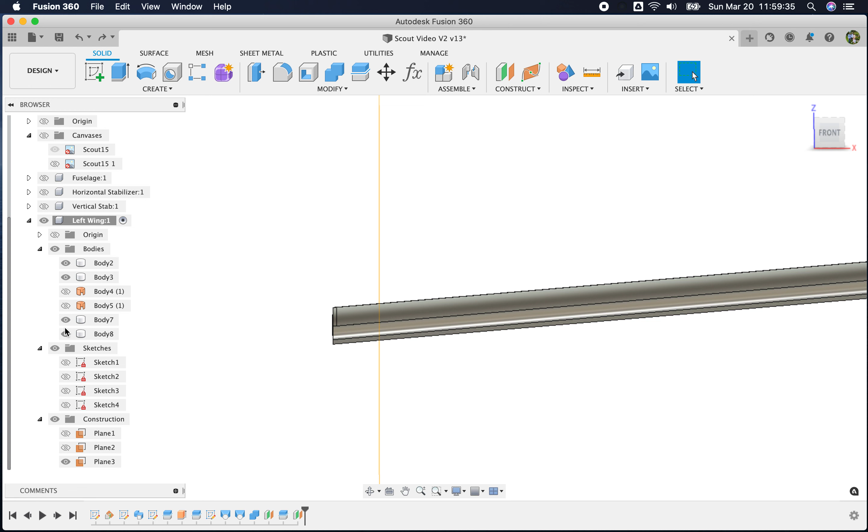Let's go to plane 1, and I'm going to create a sketch on this plane. Let's turn this plane off. I don't like this going back and forth because it makes a video hard to follow. I apologize. So here's our fuselage side, and this rib is going to lie there.

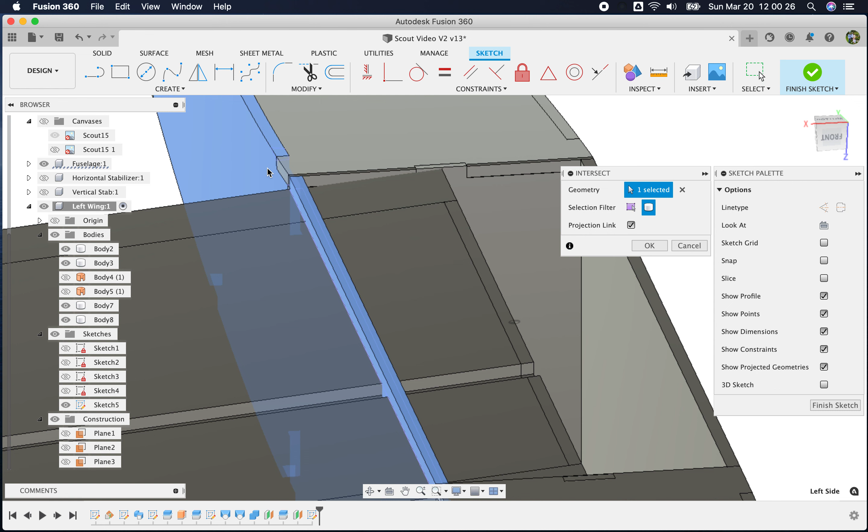What I want to do, I am going to go to intersect. And I want to intersect this body. And this is the body that I want to intersect. Now we can turn the fuselage off. And you can see there's our intersection with that. And that's actually 1/8 of an inch.

And while we're here, since we're on this plane, we're going to go ahead and sketch out all the rest of our ribs. I'm just going to create a line. First, let's project this edge right here. All right, let's do an offset with no chain selection, and I can't get that, so we have to project it. Project that. Say OK. Do an offset.

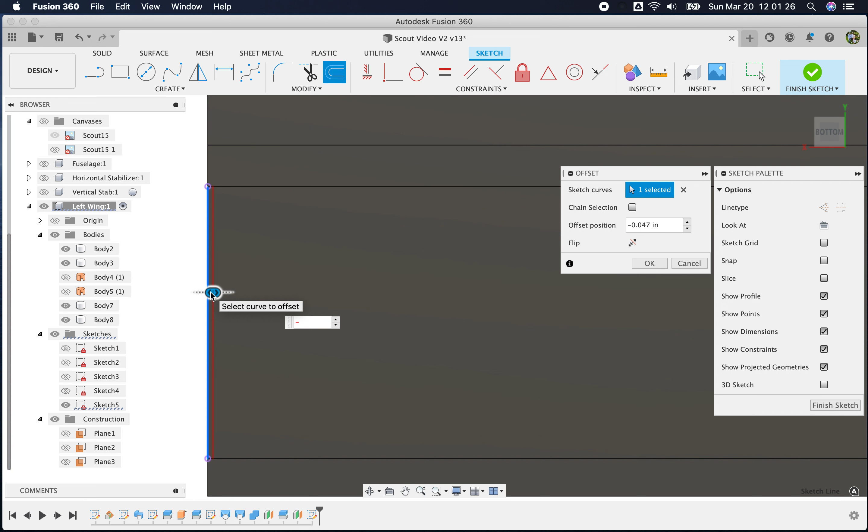And I'm going to do 3/32 ribs. So I'm going to go negative 3/64, and I'll show you why in a minute. There we go. So that's what we're going to use for our end plane. And let's get rid of this relationship, and I want to extend this line out just past the edge of all of this center body where we're going to make our ribs.

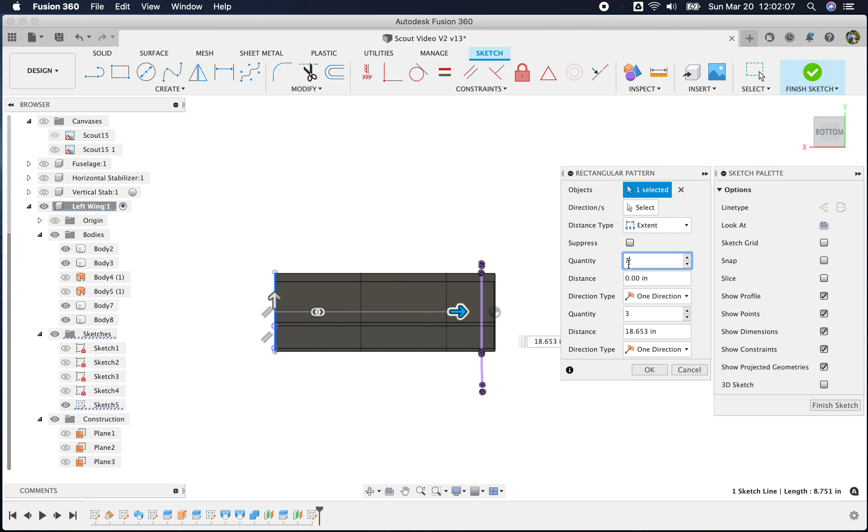Now let's go to rectangular pattern. We want this line, and we're going to move it along this path. And we want 7 ribs. You can specify the spacing you want between everything, or the distance, however you want to do it.

That looks pretty good right there. I'm just guessing here, but you can do more math. So what I would probably do is have a way to measure between here and there, or know what this dimension is.

18.653 inches. Let's go 19.5 inches. That looks pretty even between all that. And again, if you have your profile or your canvas profile here, you can actually space it and you'll see where the ribs all line up. But in this instance, this is going to work out fine.

So let's finish this sketch. And what I want to do first, I want to make this W2 rib, and we're going to extrude this profile.

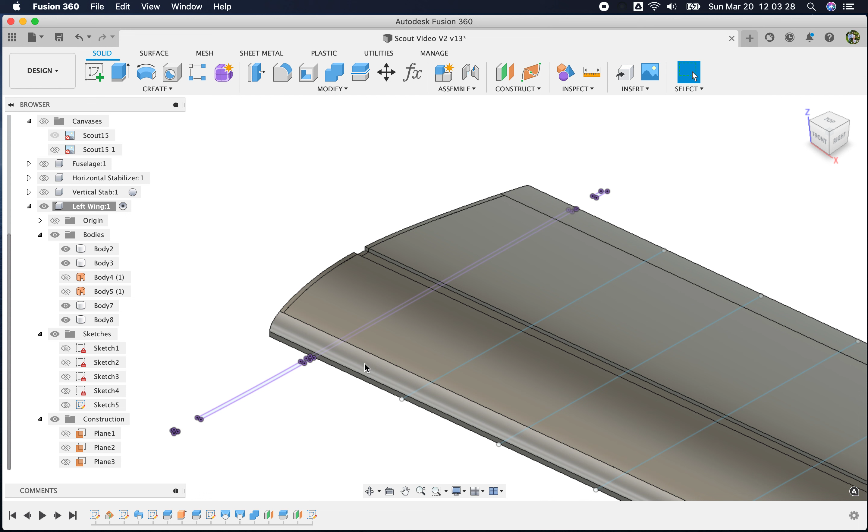I'm going to come up through here, and I'm going to change this to intersect, and let's go 2 sides just to make sure we get everything at the bottom, and we're going to click OK. And that's not how I wanted it. Oh, so before we do that intersect, let's turn this leading edge off.

Let's rename this, and let's turn the trailing edge off, because what Fusion sees is what you see, and that's what it will cut. There's our trailing edge, and we're going to turn that off too.

Now let's repeat that little thing here. We're going to go here, come up to extrude, and cut. We want to intersect. I'm going to go 2 sides just to make sure I'm good, and then click OK. And there we have our second rib.

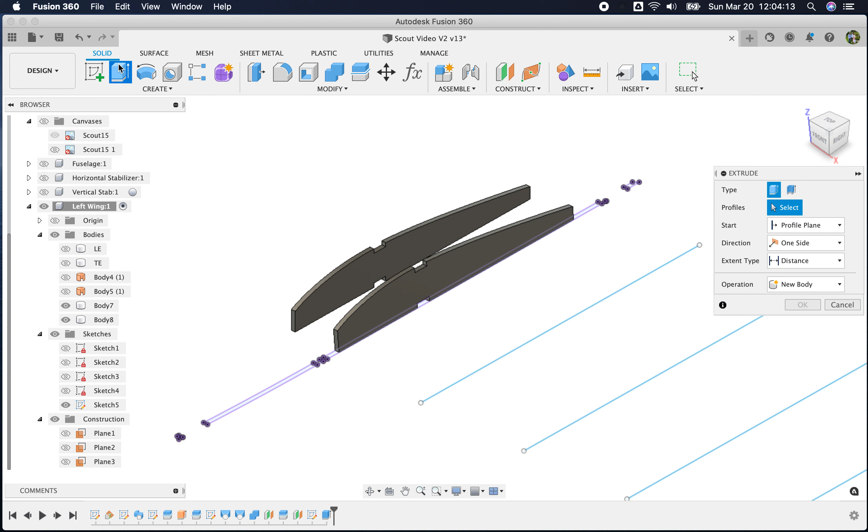Now to cut out the balance of the ribs, we're going to go to extrude. Actually, that doesn't work either because it gets rid of that. I should have done this a little bit different. That's okay, I'm going to do it this way.

Let's go in and edit this sketch real quick. I'm kind of doing things a little out of order than I normally do. Let's create a center line in here. There we go.

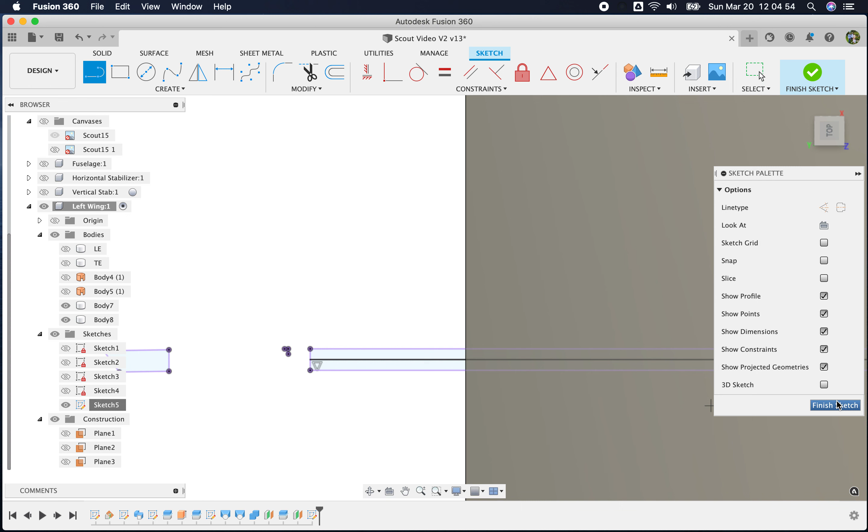Now let's go to our extrude. I'm going to select thin extrude. I'm going to go here, here, here, here. Select all these lines.

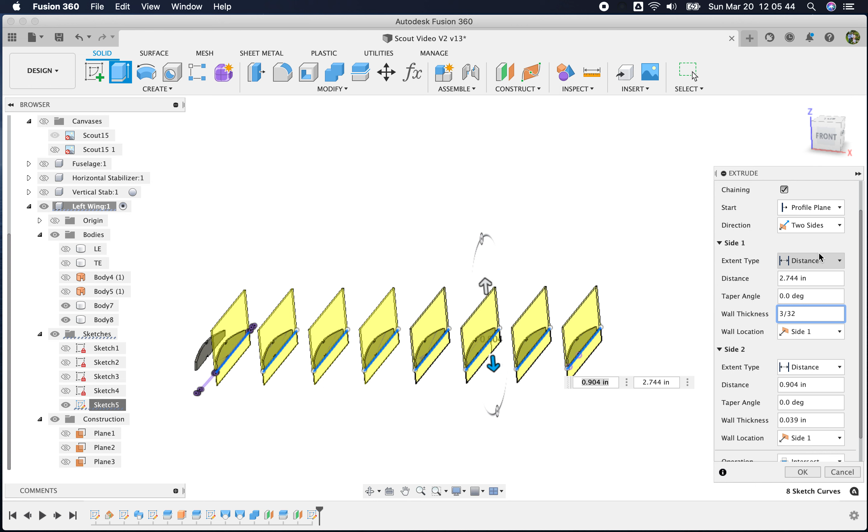Going to go up and change this to intersect. I'm going to go ahead and do it 2 sides just to be clear that I have it all. And then let's change this wall thickness to our 3/32. Okay, and change this to symmetric, that way all these parameters match up and down. And we intersect, and there we have our ribs.

And let's go here and turn our leading edge and trailing edge on, and there you have that. And let's go back to - is it this sketch? Yep, that sketch and this sketch.

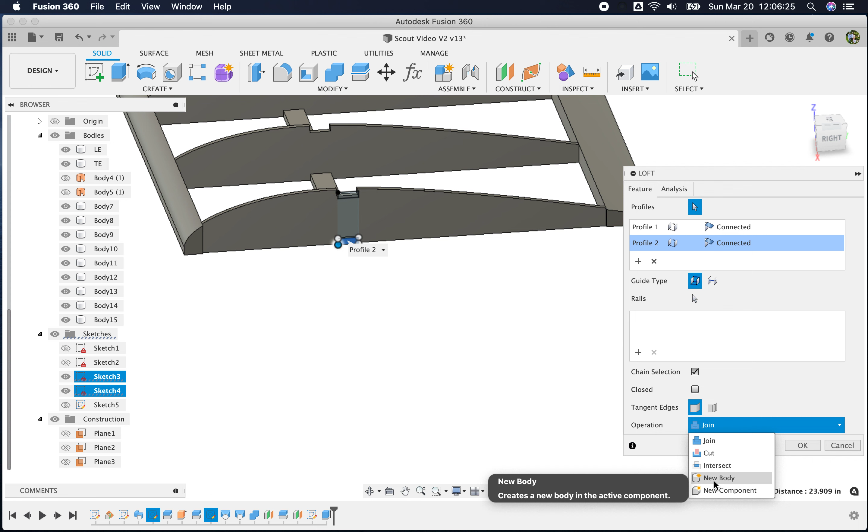We're going to create a loft. This is going to be for our spars. I'm going to select that profile, come back over here, select that profile, and I'll want to go new body. Okay, then we select OK. There's our top spar, or our bottom spar.

Let's create our top spar. It's going to be this. You're going to cut spars out of stock material versus the other way, so it's okay for selecting the curved part. I'm going to go here, and we want to go new body. There we go.

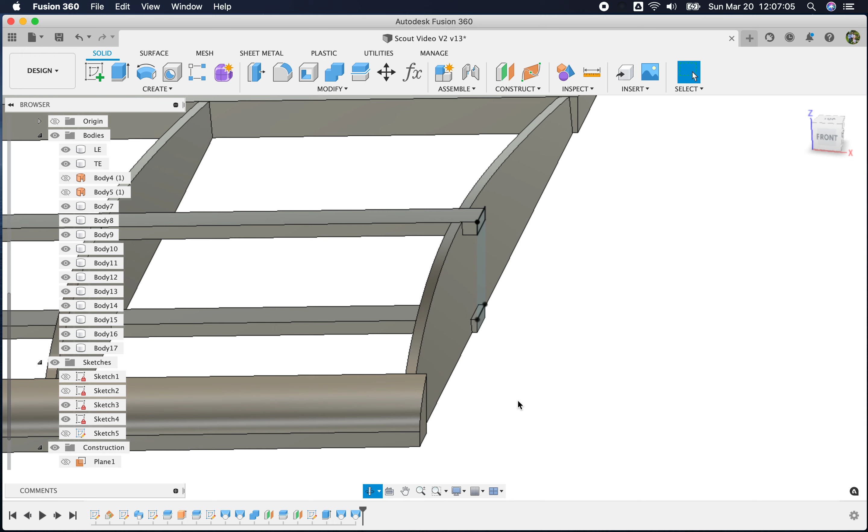Just like that. Okay, now you notice we have the right angle on this end rib right here, but none of this material is correct. It's kind of in plane with the other, with our true horizontal.

So I'm going to create an offset plane on the end of this rib, select OK. I'm going to go right here to split body, and I'm going to select the bodies that I want to split, which is all our spars - this one and this one. Our cutting tool is going to be this one. I'm going to select OK. I'm going to come in here, find out what these bodies are, and I am going to remove them.

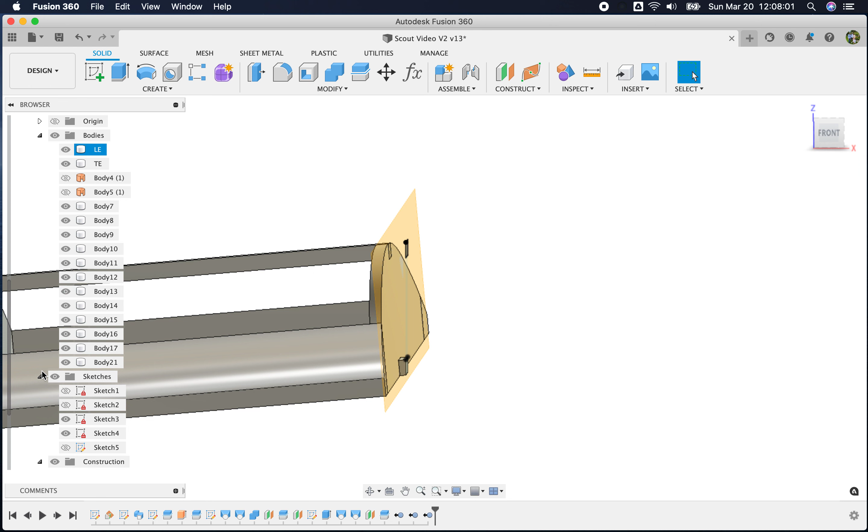Let's turn our sketches off. Turn these off. There we go. Alrighty, so there you have it - that is the beginnings of a wing.

In the next episode, we're going to talk about creating the center sheeting and creating our joiners, our wing joiners or dihedral braces, whatever you want to call them. And we can talk about how to go about making your ailerons back here, and even put some servo holders for our aileron servos.